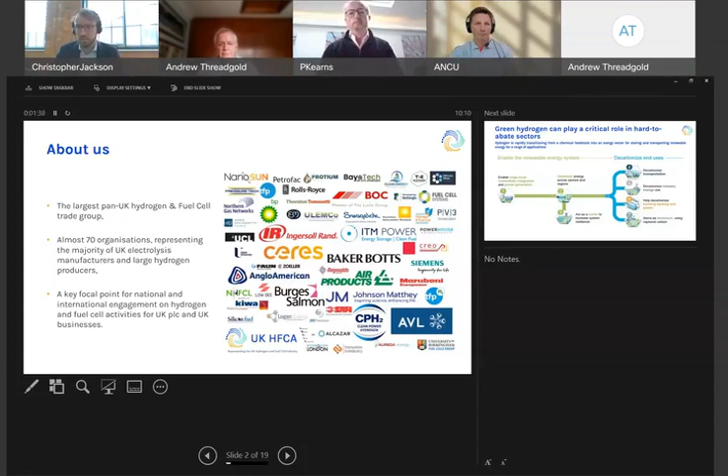So we're playing quite a significant role at the moment in trying to ensure that this next wave of the zero emission transition is essentially one where the UK can take the most opportunities to really lead in and develop a strong manufacturing and skills base. And obviously, it can stay a key part of that process and continue to be a leading market, as well as more broadly the London market. And insurance is something that we're obviously keen to support as well.

So getting right into it, a little bit of background. I think people probably by this stage will have been reading a number of articles around hydrogen and probably asking themselves, why are we talking about hydrogen now? What is the relevance to the particular discussion today?

So maybe as a quick starting point, today we produce around 110 million tons of hydrogen annually, 70 million tons of which is commercial. It's about a $135 billion market annually, with around 50% of it going to the production of ammonia and the balance going to processes such as the refining sector, hydrogenation of fats, direct reduction of iron, and various other applications.

What we are talking about more broadly in the press, and I think more broadly in industry, is looking at the opportunity to use hydrogen as a fuel for the energy sector transition. And really, there are several drivers behind that. The first is a bit more of a macro picture story, which is that when you look at the global energy consumption pattern, around 20% of total final energy in the world is consumed as power, and the other 80% is in transport and in heat.

And when you look at the story of decarbonisation over the last 25 years in those three blocks, you'll see that we've made reasonable progress in the power sector and almost no progress in heat and almost no progress in transport. And a large part of that is because while electricity is a very valuable form of energy that I think we all use today, it's not particularly convenient, it's not particularly flexible, and it doesn't necessarily provide all of the things that we want energy systems to provide us.

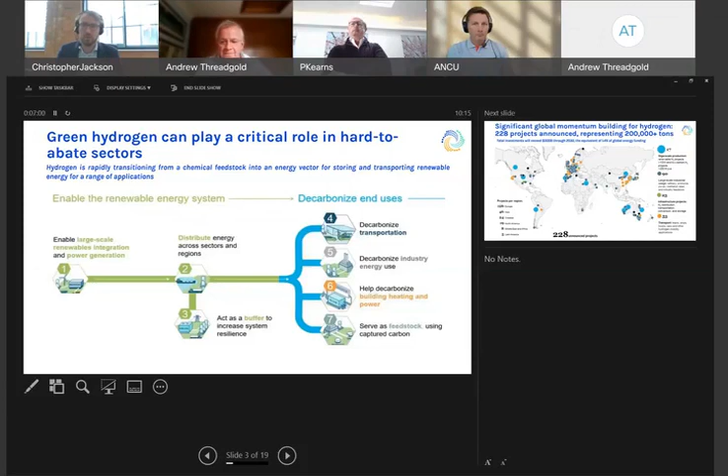And finally, the idea then of using hydrogen to actually create products. So where you can capture carbon from an industrial process and combine it with hydrogen to create products like green methanol or green ammonia. And these can then be used for the shipping sector or for other sectors where, again, we need to decarbonize.

So in the last 3 years, we've seen a huge amount of additional interest in and around hydrogen. Hydrogen Council's tracked about 228 projects globally. At the moment, there's line of sight on about $300 billion of projects that have been announced publicly, of which they think about 80 billion is significantly advanced, and then another 220 is in its earlier stages of development. They've been largely European concentrated till now.

However, there's a huge amount of movement now in North America, with the latest announcement of a moonshot program to try and get the cost of hydrogen down to extremely low levels by 2030. There's also a huge amount of interest in Asia, specifically in places like Japan and South Korea, where there's a lot of discussions around actually saying, can we replace the coal-fired power stations we have today with ammonia, where that ammonia is created from renewable sources.

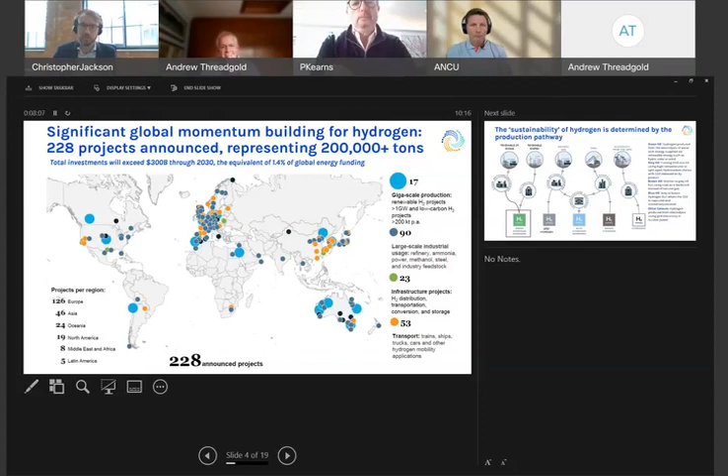And so a lot of very, very cheap renewable locations, including Australia, Oman, Chile, and others, are looking at, can we use our abundant solar and wind resources to create cheap green ammonia and then use that inside a lot of these existing power plants so that we don't have to replace existing assets, we can repurpose them and decarbonize them.

A little bit of terminology for those who aren't familiar. Hydrogen has, unfortunately, a lot of colors and it confuses a lot of people. So just trying to make this fairly simple. Broadly speaking, when we talk about green hydrogen, we're talking about hydrogen that either comes from a process called electrolysis. So if you remember your school chemistry classes, that's using an electrical current to split water into hydrogen and oxygen, or it can be the reformation of a bioenergy source.

So that can be biogas or biomass, where you're essentially saying that the carbon associated with that is net zero because it's a form of carbon that already exists in the environment today. You're not adding to it. And as a result, you're then splitting hydrogen from that carbon-based fuel, and that is considered green.

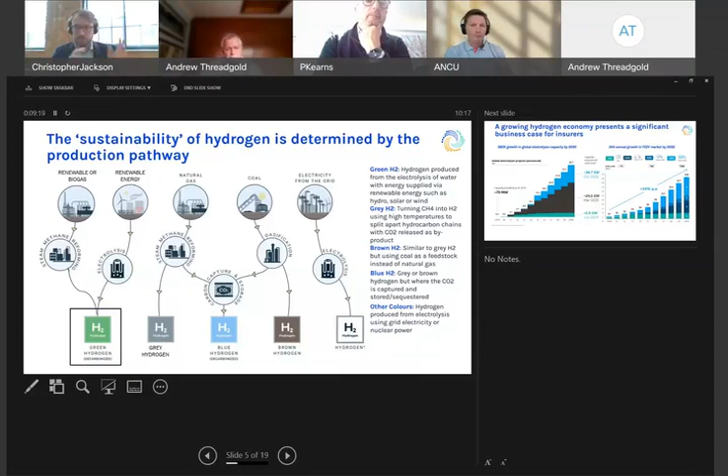Gray hydrogen is where you're extracting hydrogen from natural gas, and you're just releasing the CO2, which accounts for the vast majority of hydrogen production today in Europe and in North America. Brown hydrogen is where you're taking it from coal, and again, it's a similar process, reforming, gasifying that coal and then extracting the hydrogen from it. And blue is essentially where you're able to capture the CO2 that is coming from those fossils that have been converted into hydrogen and then store that CO2.

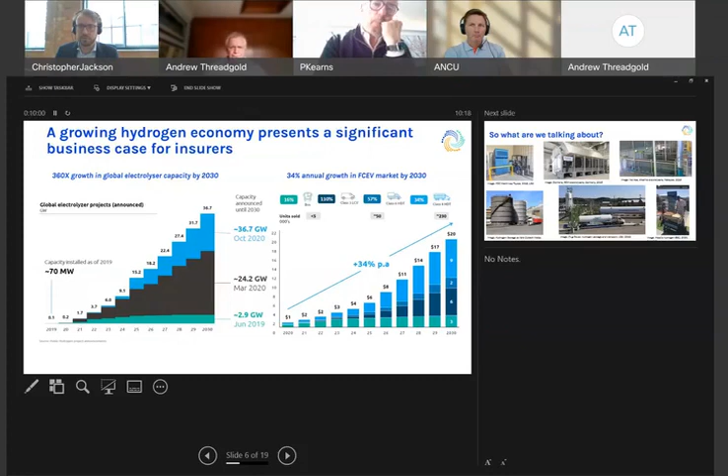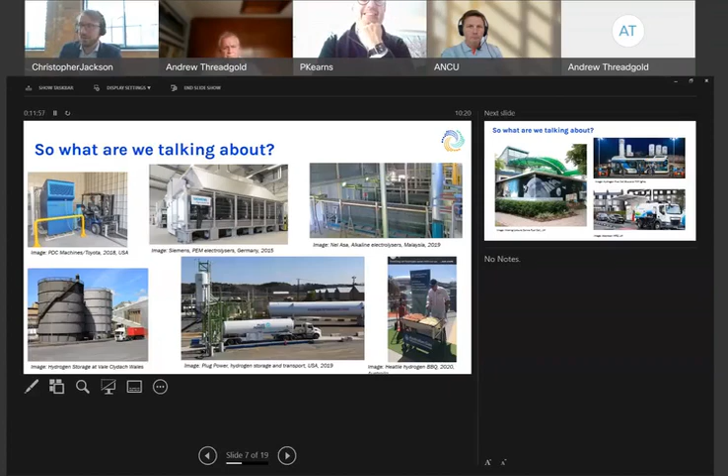A few other quick ones here. So image on the left is the Woking Leisure Centre, which has had a fuel cell operating in it since 2000. It was actually funded by the US Department of Energy. So for anyone who's around there, that's an example of technology probably under your nose. The other one is that there is actually a fuel cell system in the walkie-talkie building in London. So again, people might not be aware of that, but there is a system that's been running there for over 5 years too.

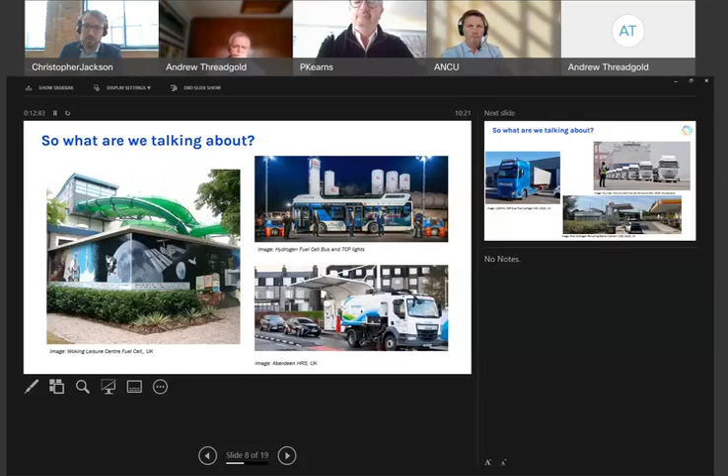There are fuel cell buses operating now, roughly over 3,000 globally. The image on the top right is one in Northern Ireland, but there are others that have just been announced in London, in Birmingham, a number coming into Liverpool and Brighton, and several hundred in Europe. And also hydrogen cars. That includes the Green Tomato taxi fleet in London, where there's 50 Toyota Mirai, but also things like street cleaners, which we're starting to see in Aberdeen. And then increasingly trucks as well.

So the top right was the first 20 Hyundai Xcient 20-ton trucks that were delivered into Switzerland last year. Dual fuel, diesel and hydrogen trucks in the UK, like the DAF image on the top left. And for those of you who go past the Cobham M25 station, there is a hydrogen refueling station that's also there. So you can drive and see that whenever you want to.

So what does a green hydrogen project actually look like visually? So I'm going to give you an example here. This is a 20 megawatt solar PV project with a 10 megawatt electrolyzer. It's in Fukushima in Japan. The hydrogen produced is then injected into the gas grid, and they blend it up to 5% with natural gas. And it's a way of increasing the amount of domestic renewable resource available, but converting it into a form that's most needed in the area, in this case, gas rather than pure electricity. So just a bit of a whistle stop, but hopefully gives you some ideas.

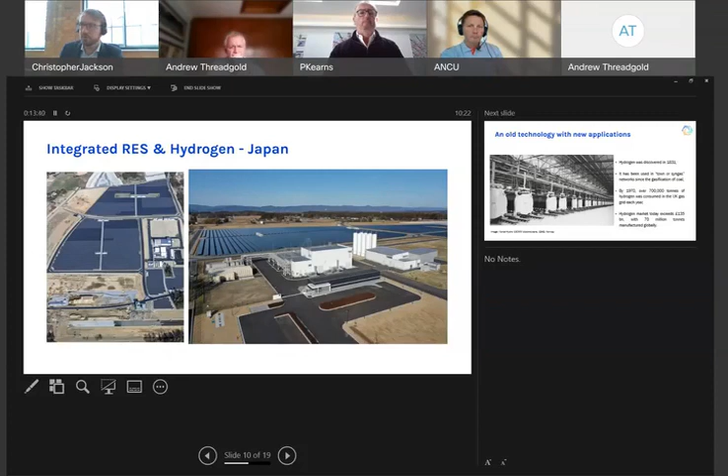And repeating something that I'm sure many people will have said before, this is an old technology. Electrolysis itself as a process is over 100 years old. This is a 130 megawatt alkaline electrolyzer in 1949. Large-scale electrolysis was very common in the days prior to mass shipping of ammonia, because frankly, it was a local game to create hydrogen, and it was largely done behind large hydropower sites. So Egypt, for example, or Norway, or places like Zimbabwe or China did have, and many still do have, large existing alkaline electrolyzers.

In the UK, we also used to have a large portion of hydrogen in our gas grid. For those who remember the town gas grid systems, or families who might have had town gas, there was at one point 50% of all the gas within the UK system was town gas. So it was hydrogen within the town gas system. And that actually, by our calculations in 1970, meant we were consuming over 700,000 tons of hydrogen within the gas grid at the time. So, when we talk about blending into the gas grid, we talk about hydrogen in homes, we talk about changes of applications, a lot of these things have already been done before.

And indeed, over a 10-year period, we moved from a town gas system to a 100% methane natural gas system and changed over 40 million gas appliances at the time. So when we talk about these things, they're not outside of the realm of the possible. And I think that's something we need to focus on a lot when we talk about the decarbonization challenges. It's not just what is the optimal for someone sitting in a room with an energy system model.

It is also what is practical and what is deliverable. And actually, I think one of the pieces we see about hydrogen is that it's a technology and a solution that we've used before, that we're familiar with. There are robust procedures in place. And the question is, how do we make it commercially viable, and how do we expand its range of applications to find those appropriate solutions?

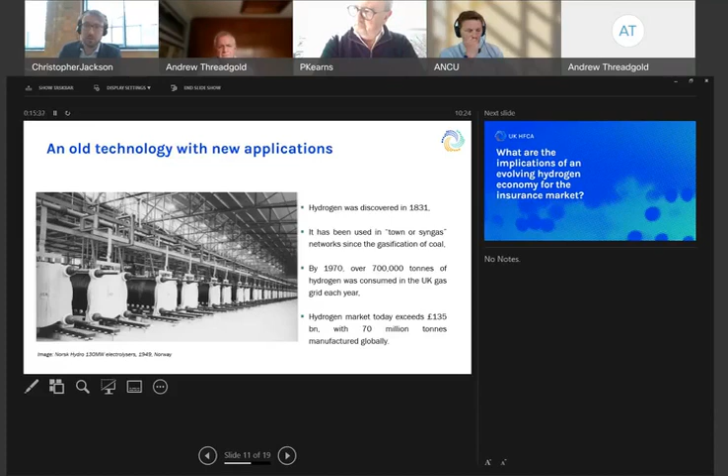Hydrogen will not be the answer to every single energy problem, but it will be a significant part of the solution for many. So some of what I've spoken about will have obvious implications for the insurance market, but maybe let's make them a little bit more specific. So clearly, given the size of the hydrogen market today and the fact that many underwriters are already covering ammonia production facilities, they're already covering refineries and other chemical sites, hydrogen risks are already being insured and placed within the London market.

I think part of the challenge perhaps is that it's not within the conventional energy market, more likely within the property and other forms of specialty markets. And as we've mentioned, the key here is to think about the fact that hydrogen is moving now from being a process or a feedstock gas into being an energy source. And what does that mean from an insurance perspective? And what does that mean for the risks and end use profiles?

And how can we then take the benefits of all that experience and lessons learned on how to insure the type of risks that are coming out of hydrogen production, storage, and distribution from those markets where it's already being covered today, and bring those learnings across into new markets that are less familiar with it. There are obviously areas as well where Lloyd's can lead on some of this, and other markets in London have led on new forms of technology.

So from our side, I think that's where, from the industry, we'd like to see more engagement. I think the market could play a huge role in helping to unlock some of the financing opportunities around it by being able to show that these are risks that the markets have seen before and that they're comfortable with. Maybe just to recap some of those risks for those who perhaps are less familiar. There are a couple of the obvious ones.

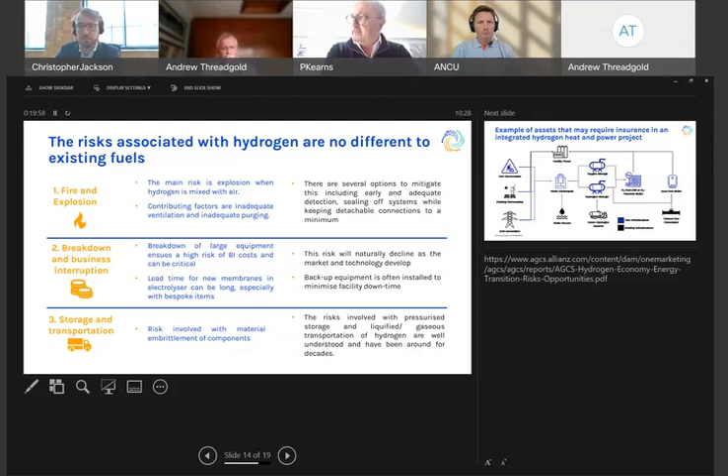So maybe just explaining what some of these projects actually look like. So when we talk about a green hydrogen project, the main 2 ingredients, if you like, are the source of electricity and source of water. There are a number of different ways in which you can source that electricity and a number of different business models being pursued in the market to look at this. Some is additional renewables, so building new solar, new wind, new hydro. And part of that, as I say, is tied to government policy and tied to what some investors and some end users want to see, which is additionality, evidence that you're not simply repurposing electricity from the grid, you're actually adding new renewable electricity to the grid.

Some projects are looking at connecting to existing renewables, so those that may already have contracted off-takers, they may already be under a feed-in tariff regime or some other form of price support, and some may just be a more generic grid connection where there is some form of power purchase agreement or deal signed with a utility. When we're then looking at the electrolysis process, an electrolyzer itself, it's an electrochemical reaction. So in that sense, there's not a lot of moving parts, but there is an importance of making sure the water source is correct. So the most valuable part of an electrolysis system is the membrane. The wrong source of water can contaminate the membrane and can then lead to a loss on that asset.

So that's something that's very important to consider, as is actually then the ultimate treatment of oxygen from that production process. So hydrogen obviously is the commodity that most people want, but there is a significant volume of oxygen also created on these larger projects. And in smaller electrolysis projects, oxygen can be vented, but in larger projects, that's unlikely to be deemed safe or appropriate. And so having the right measures in place to ensure that that oxygen is either being stored or is being released in a safe manner is important. And then obviously how you distribute that hydrogen afterwards. Is that going through a gas grid connection? Is that being moved by vehicle? Different projects have different configurations.

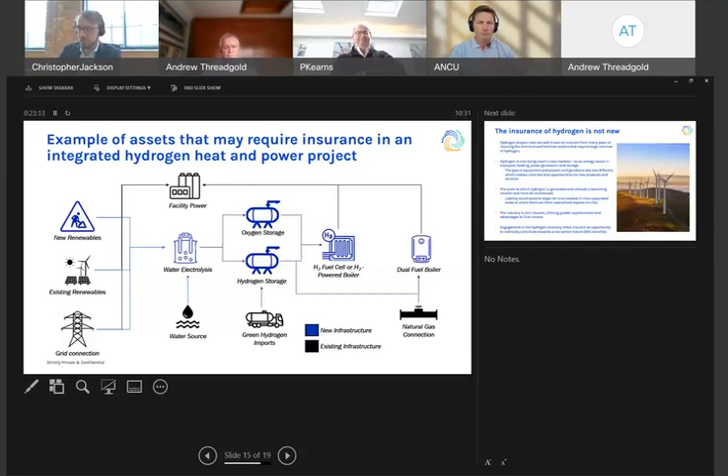Others are going to be dedicated lines where they may be combusting up to 100% hydrogen. And again, there are sites that have been doing that for a long time. So if you go to the Inovyn site in Runcorn, that site has been combusting 100% hydrogen as a byproduct of its chloralkali process for over 50 years. So again, a lot of this is probably familiar, but we can always cover this more from the questions.

So just to close up and repeat on some of the common themes, it's really important to emphasize here that the insurance of hydrogen is not new. What is new is the way that some of these hydrogen projects are being configured and the way that hydrogen as a product is being used. And that's the piece that I think is critical to focus on, taking the lessons and understanding from those sectors within the insurance market that have familiarity with hydrogen and bringing those learnings into the renewables market, and being able to also draw on learnings from other early renewable systems, including biogas, is really important.

It is the case that there will be some creative thinking needed around certain products like business interruption and around third-party liability. So hydrogen is not a pollutant, so you're not going to have soil contamination if there's a leak, and you're not going to have those legacy liability issues, but you do have other issues to consider, like the blast radius concerns and other safety concerns with regards to leaks.

Obviously, the other component that people have picked up on is that for green hydrogen, much of the market might be distributed and so decentralized. That then may mean that unlike a large chemical site or a large refining site today, you do not have the same number of people constantly on the site with that same level of technical expertise monitoring these assets. And so how do we ensure that that is still safely done, still done in a robust way, without imposing huge costs on these distributed projects by having a very large permanent presence there?

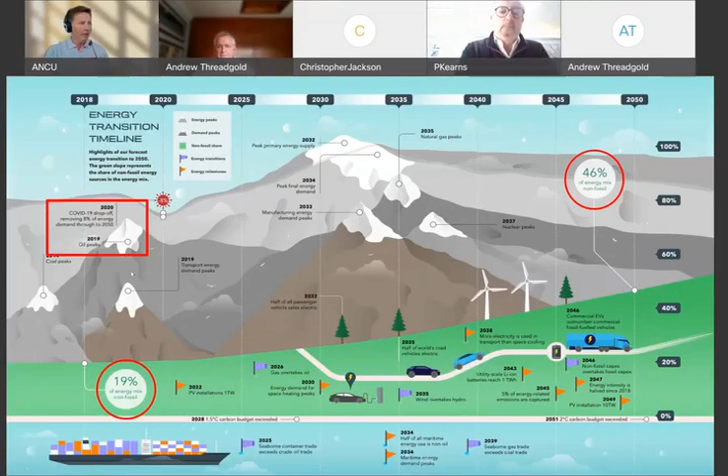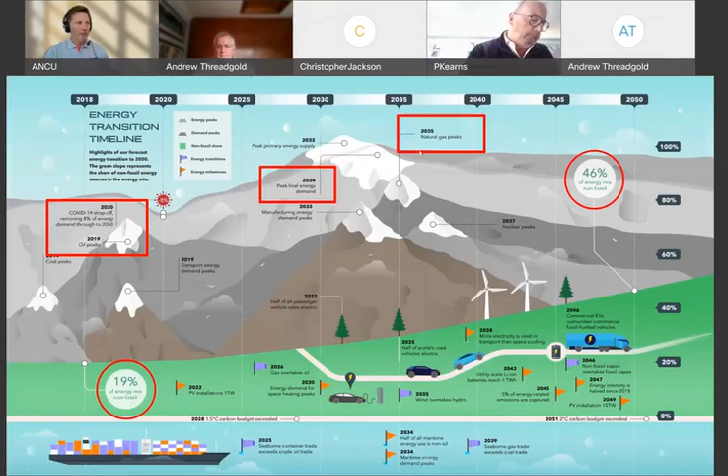Further detail, COVID drop-off on significant energy demands, as we're all aware, from the point of view of transportation, traveling and things like that. Energy, we're looking at a peak energy demand in 2034, and then natural gas peaks, but then obviously turns off in some areas from there.

So hydrogen production, Chris has already mentioned this, so I don't want to dwell on that, but obviously at this moment in time, as things develop, it's a supply and demand journey. As things develop, renewable energy will grow significantly, but obviously that's based on the demand from a consumer or an industrial point of view as well.

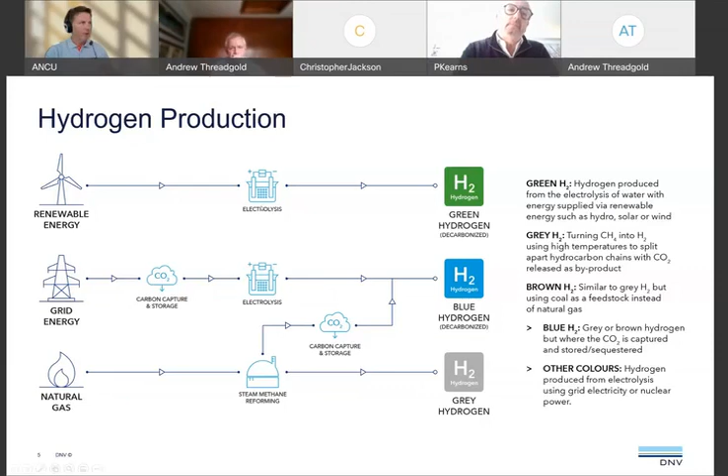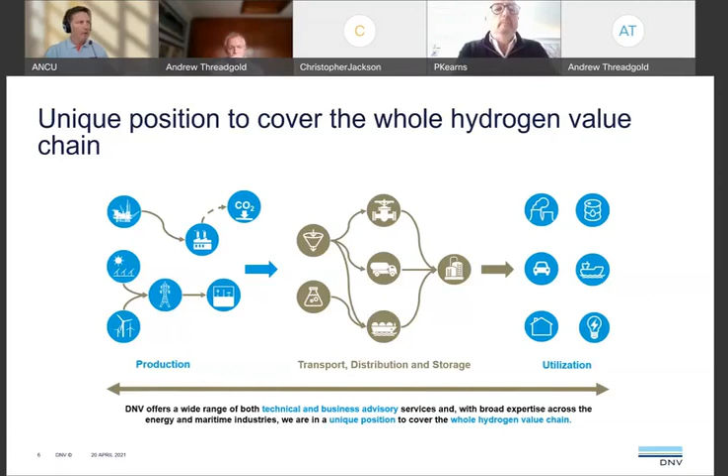Unique position for DNV. Obviously, we provide technical and business advisory services from the production, transportation, and also utilization points of hydrogen and cover the whole value chain. So really from a maritime aspect to transportation on land to the types of burners and power aspects to be used. So we cover the whole project life cycle at the moment.

What I want to talk about today is a little bit about the R&D and innovation aspects as well. We've seen a little bit about the concept selection and operations, but let's talk a little bit about the R&D and innovation. And that's a legacy we've been involved in in the past, from North Sea research into natural gas research and heavily into LNG, and now understanding the comparisons to hydrogen from, shall we say, a safety point of view, a risk point of view, but also understanding how it's managed.

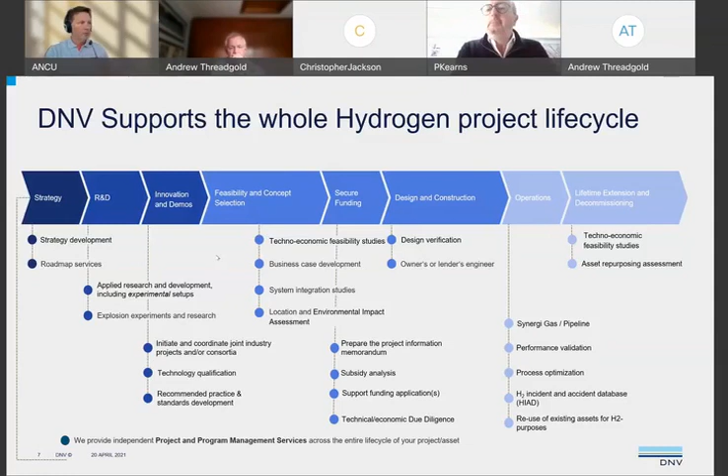So regulatory issues at this moment in time. This is just a slide from the EU. So a lot of discussion on hydrogen guidelines, working with the gas transportation companies, the TSOs, the end users, fueling stations, but also the production aspect. So there are some challenges going forward on regulatory issues, bearing in mind a lot of these frameworks and foundations are already in place for natural gas. They're not quite there at this moment in time for hydrogen.

So it's understanding those aspects of repurposing gas pipelines, safety considerations, rules for hydrogen and ammonia fueled ships, classification and things like that, subsurface storage of hydrogen, road transport, and footprints and connecting electrolyzers and the electricity grid. So there's lots of things to go and focus on.

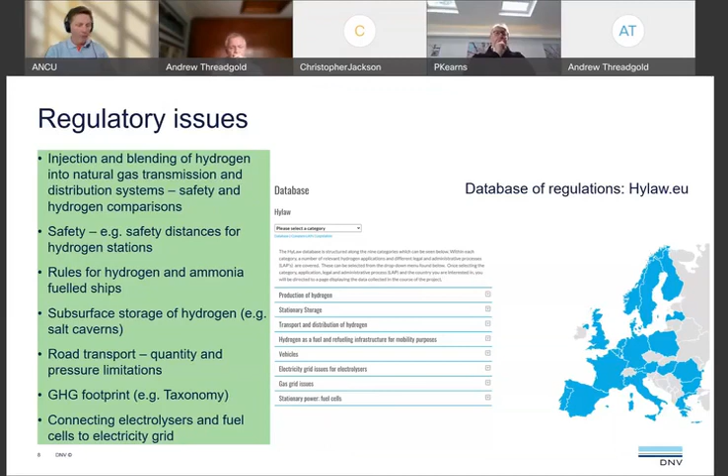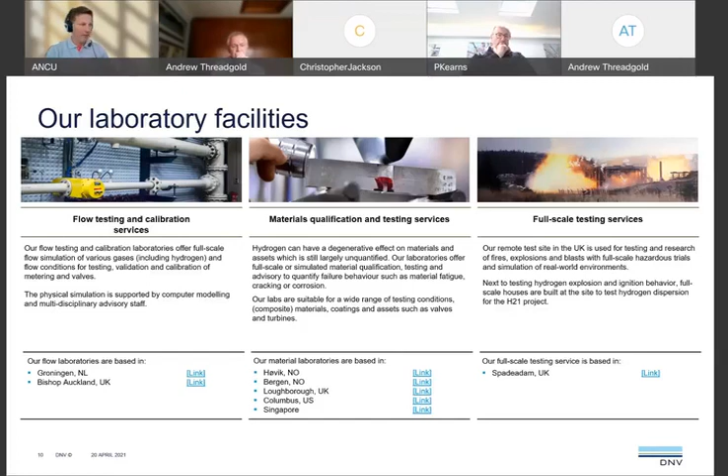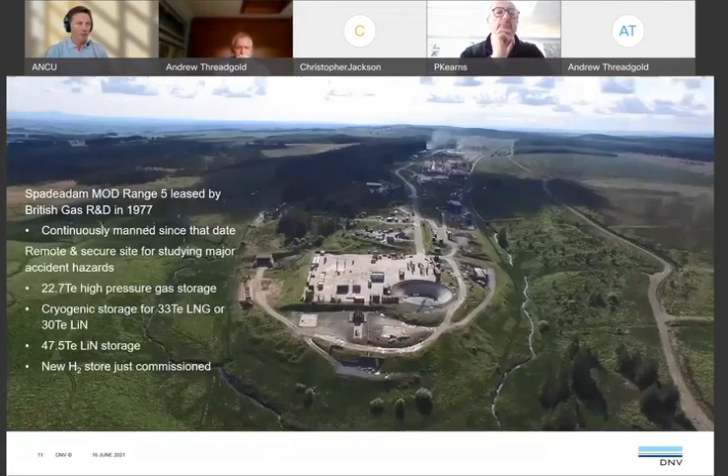So our research facilities are based on flow testing, calibration services, materials qualification, pipelines, metallics, and then some full-scale testing aspects. So all built and form a part of the transportation and use of hydrogen aspects as well. So Spadeadam itself, where I'm involved, has been well developed and well used as a research and development centre. As Andrew said, there's probably a number of people on site who've already attended this. And if you do get the opportunity, it's well worth a visit.

We've got high pressure storage on site. It's a very remote and secure site in the northwest of England. But we also have the ability to do large scale major hazard testing. And we've also got hydrogen storage, which has just been commissioned as well.

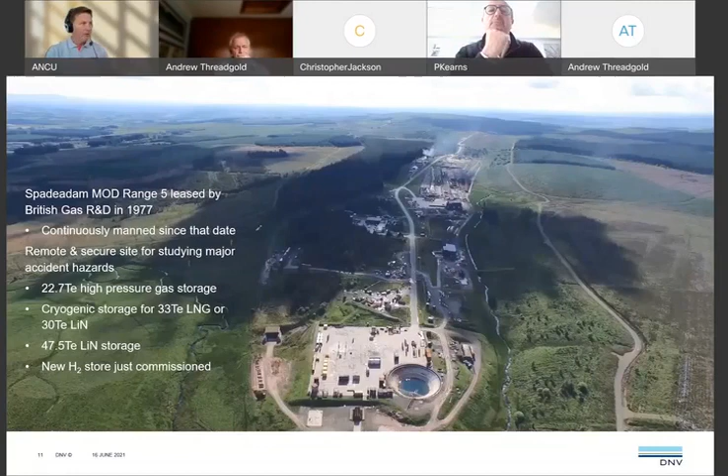So basically, our services approach to hydrogen research programs is understanding the transportation of hydrogen, looking at the hazards, the behavior, and offering some sort of risk management to understand how it could be operated and maintained safely, and also how it complies with any new safety regulation which is going to be in place.

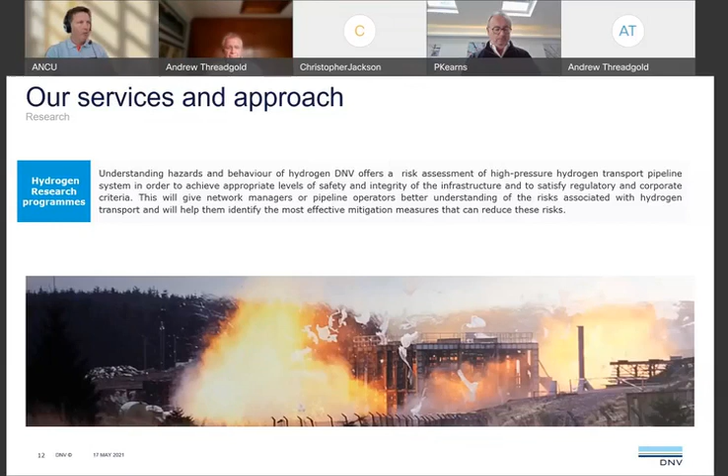As Chris said, hydrogen has been used in the past. There has been some research done on hydrogen. We've completed some research on a hydrogen filling station for Osaka Gas, understanding the different types of accumulation of hydrogen, understanding how it builds up, and also what happens if it does ignite or reaches a certain point. So those types of research need to be undertaken to understand consequences and some of the risks involved.

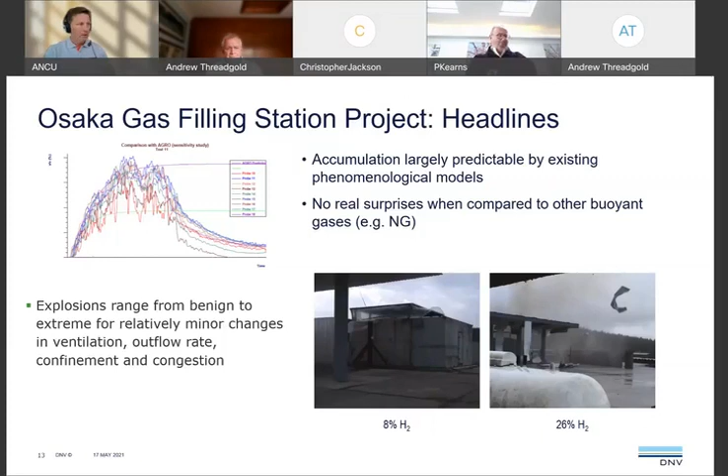Liquid hydrogen research: we're seeing more and more marine aspects on a small scale at this moment in time, but that potentially will go large scale with the transportation of liquid hydrogen, and ammonia as well at some point. So it's understanding those aspects.

And this particular project was looking at what risks or challenges there are during bunkering when they were supplying and loading hydrogen. This piece of work was done about 2 years ago, looking at how it might disperse, ignite, and build up in certain enclosures and things like that. So we have the ability to design bespoke rigs to understand the behavior of hydrogen or any other types of materials as well, particularly in confined spaces and how it builds up.

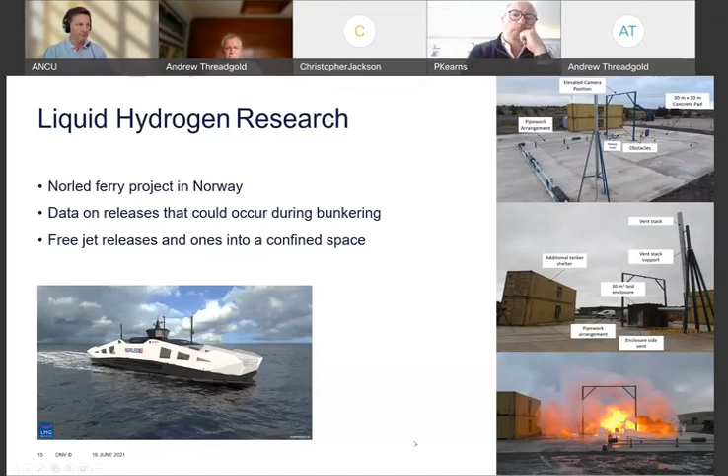We mentioned existing transportation, and Chris mentioned polyethylene pipes for the gas distribution systems. So a lot of it is understanding the repurposing of assets, potentially whether it's blending, but also further down the line, it could be repurposing with 100% hydrogen. So this project, H21, is ongoing with Northern Gas Networks. It's funded by the government through Ofgem.

The houses you see at this moment on the video are DNV High Street. We built these houses to do hydrogen research. There are 3 houses, all with different types of flooring. One's got a loft, one's got a cellar. So it's understanding if hydrogen goes into that, how it behaves, similar to natural gas as well. So this project's ongoing, and it is advancing significantly.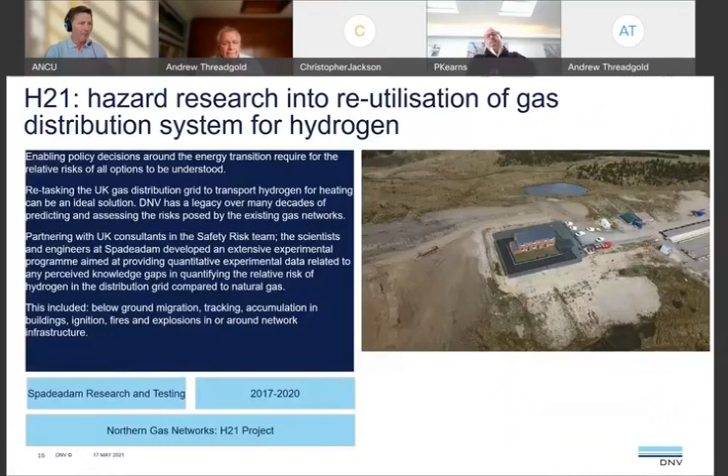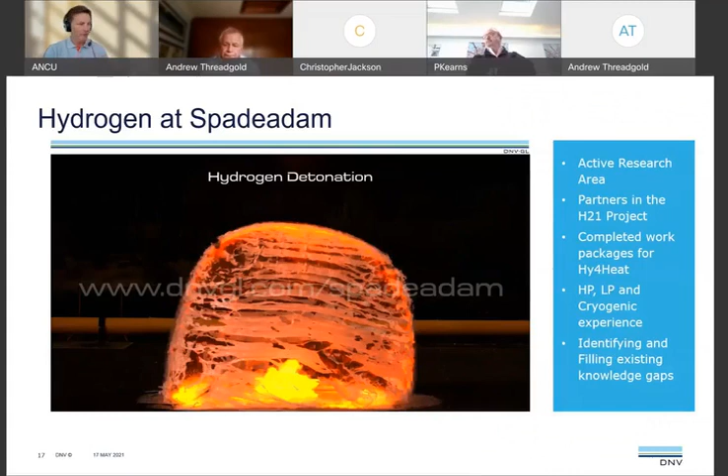This is just a little bit of understanding of hydrogen at Spadeadam. We're an active research partner in a number of projects, H21. We've completed work packages for the government Hy4Heat project, which Chris mentioned, which is being funded by BEIS but led by Arup. It also looks at high pressure storage, low pressure cryogenic, and understanding the knowledge gaps on hydrogen.

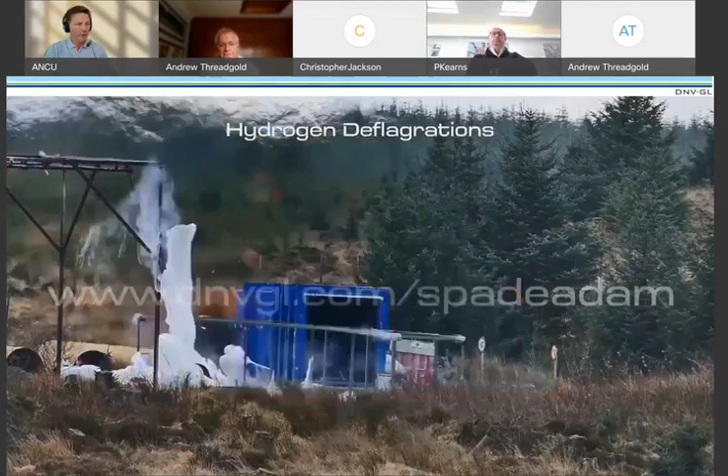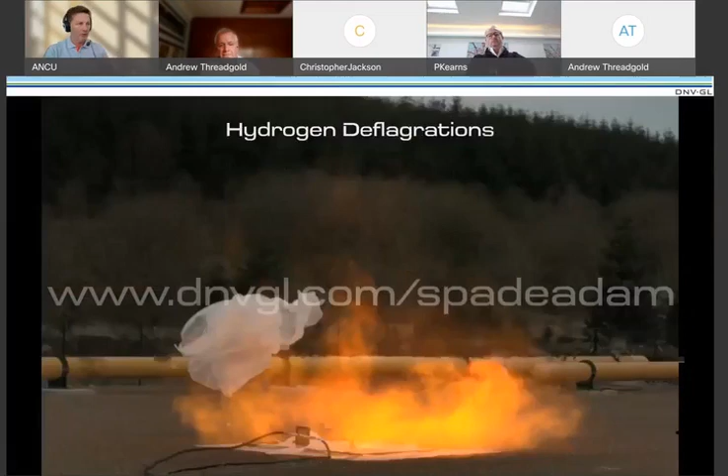And this is just a short video on some of the research and demonstrations we do with hydrogen. So it's understanding what happens if something ignites, the risks or consequences. So that's a hydrogen deflagration, a hydrogen detonation, and what happens from that point. These are all on high speed cameras, so you can actually see how it builds up. And a lot of this work is done comparable to natural gas to understand the differences in how it behaves.

So from the safety point of view, at the moment there are guides on gas safety regulations. So everything's in place for the gas requirements and pipelines. That's not quite the case for hydrogen. So there's a lot of work to be done to understand the differences of hydrogen on the transportation aspects. And simultaneously, the regulators will be looking at how hydrogen has an impact on existing regulations or develop new regulations to allow that.

So hydrogen work for H21 is looking at the QRA, test result validation of models, but also preparing draft safety management frameworks to allow the gas transporters to manage hydrogen safely through projects or longer term, whether blended, maybe 20% blends, or 100%.

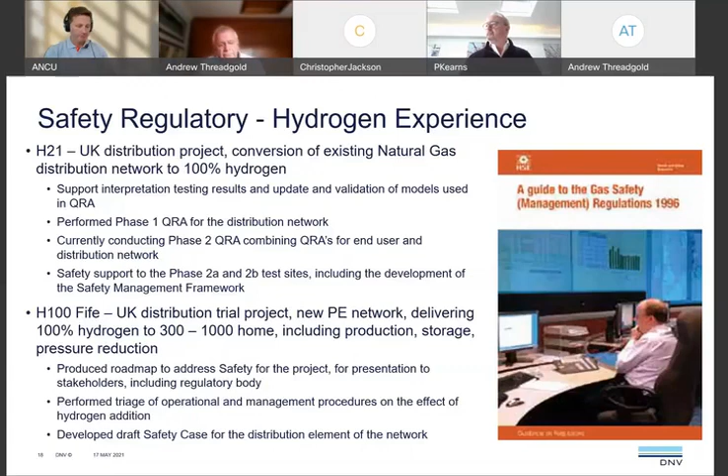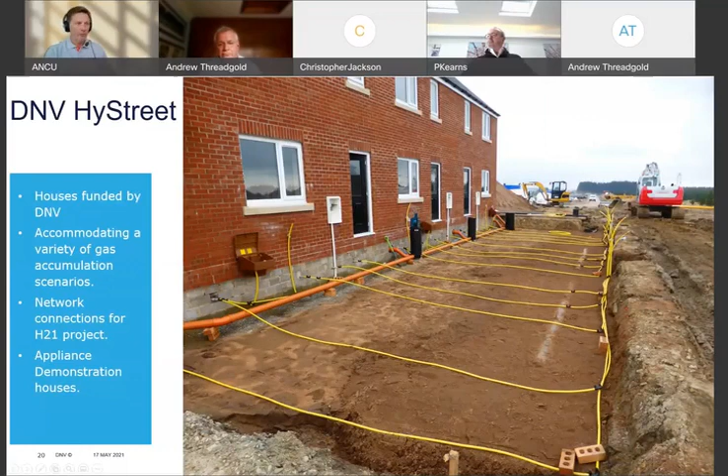At this moment we've got 2 hydrogen boilers installed in there, so they're actually running on 100% hydrogen. The Hy4Heat project was looking at the build-up of hydrogen in particular areas of the house, in the kitchen and the living room.

These are all sensors, so the whole building's very much sensored, built into the cavity walls, the ceilings, the windows, certain points, kitchen cupboards. So it's understanding how it builds up to certain levels, with comparisons of methane and hydrogen releases. That data was then fed into the Hy4Heat program to understand the risk compared to natural gas, but also any ignition potentials.

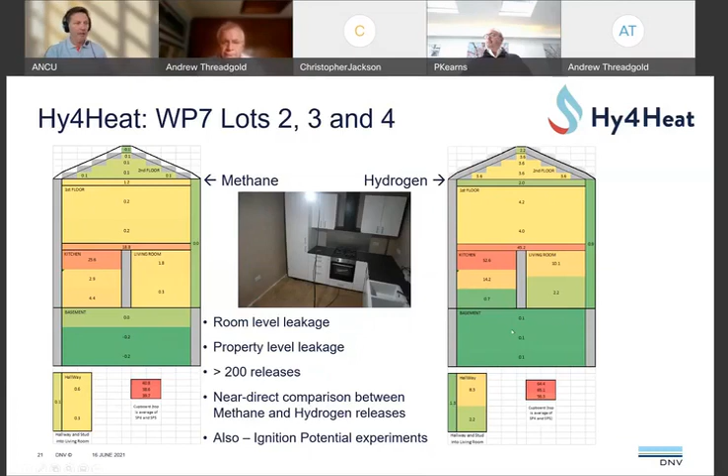As you can see, room level leakage properties. You can see a remote control window, so everything was controlled from about a kilometer away from the houses. The hydrogen could be released or vented through the windows, which opened automatically. So everything was undertaken safely and controlled.

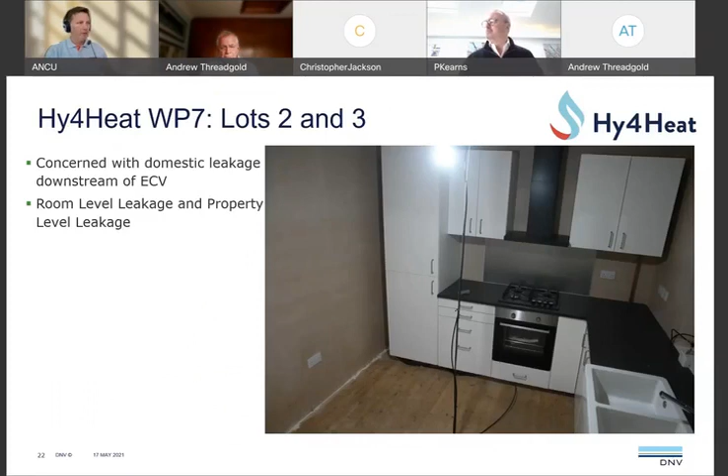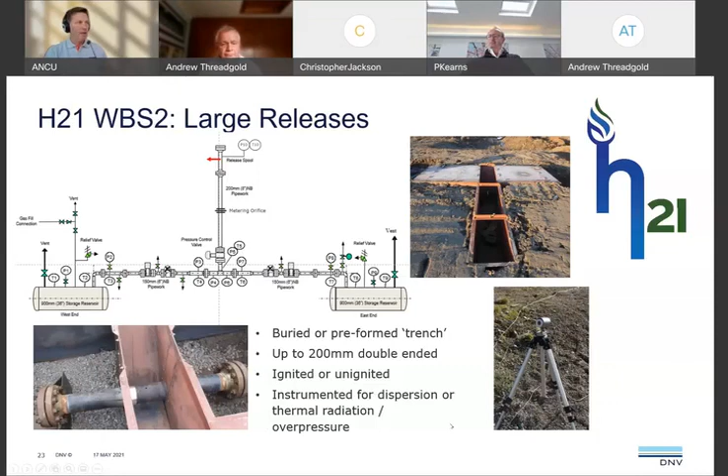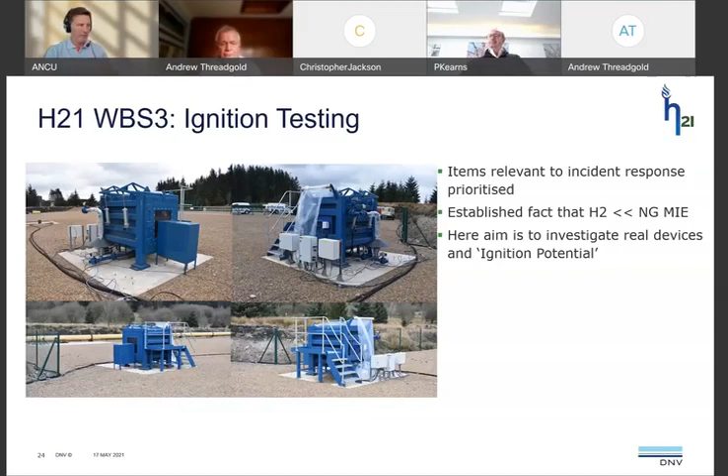Ignition potential, ignition understanding. A lot of the work previously was done on natural gas to look at what could cause ignition. These were then repeated against hydrogen, for example, iPhones, car starter motors, all the way down to domestic appliances like a vacuum cleaner and things like that, washing machine motors as well. So that data would then provide the differences for hydrogen compared to natural gas. So these were four examples of work packages from that point.

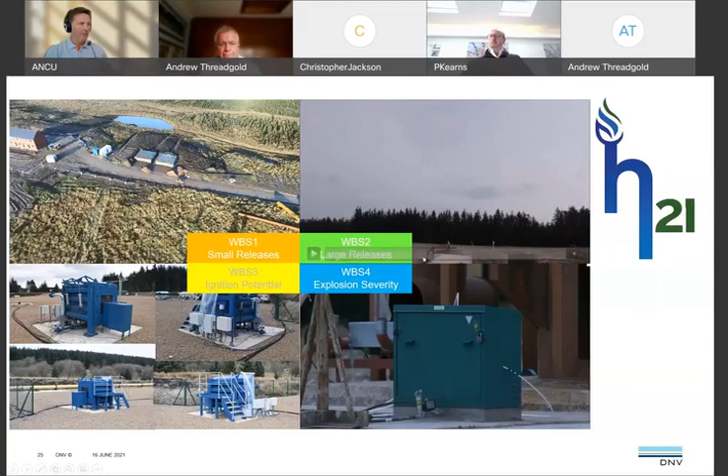Small releases had allotments set up to understand how it might track in a garden with flag surfaces or grass or a sand surface, so to build up from that point. This was the large releases to see what would happen if there was a release and it ignited, what type of data would be captured from there. As you can see, this is a hydrogen flame. This is odorless at this moment in time, but they are looking to put an odor in which would be comparable to natural gas, the same one.

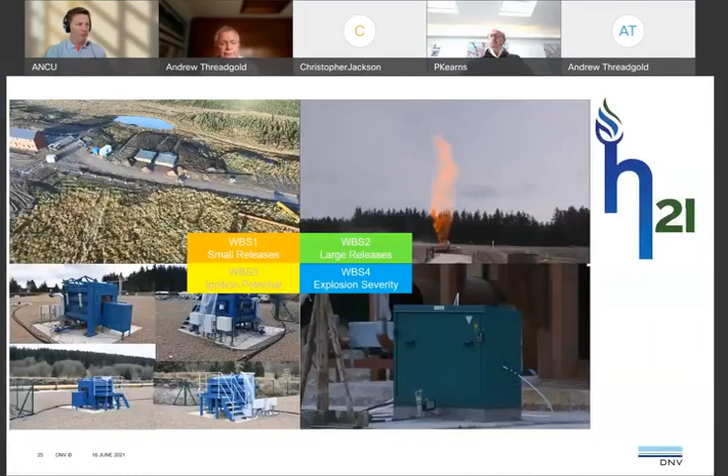And this is explosion severity, understanding what might happen with a kiosk if it did reach the ignition point. So all these were part of the H21 program, which is ongoing, progressing in detail from there.

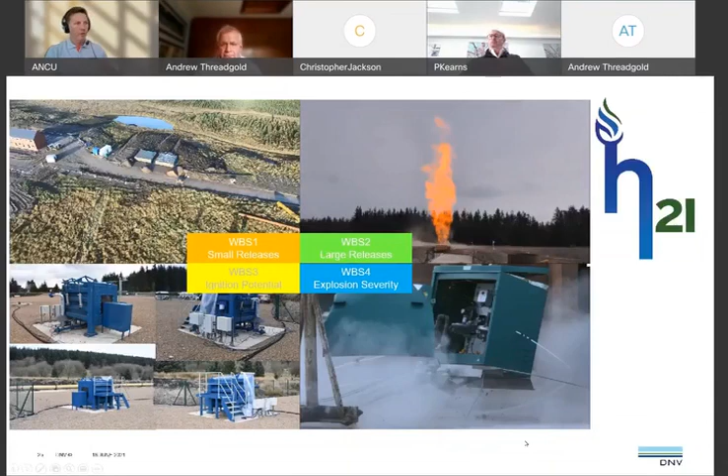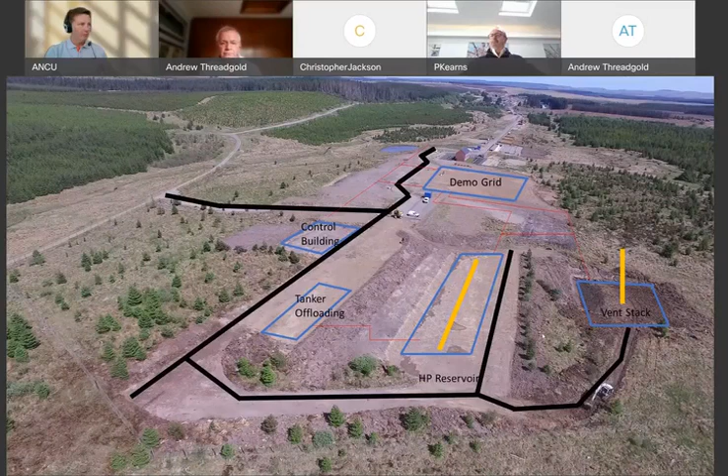So this demonstration grid is now complete. I'll just move on to that one. So we've got all this, that's the reservoir storage supplied by National Grid for the H21. So this is the construction aspect. So everything which was comparable for natural gas is being supplied and going to be reviewed for hydrogen aspects as well. So it's about repurposing, but it's also understanding the day-to-day operations.

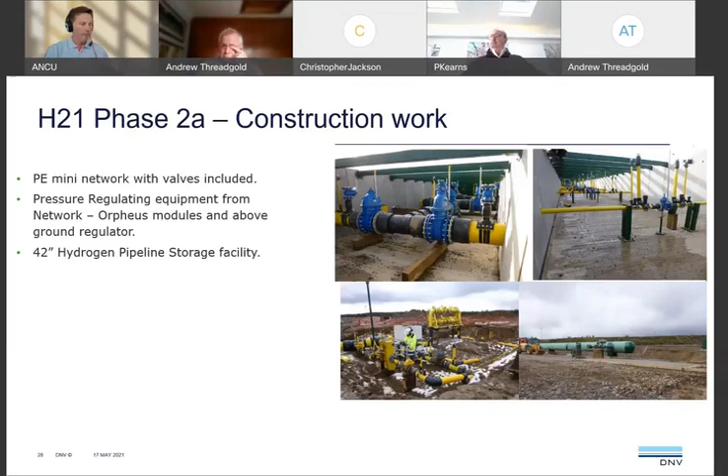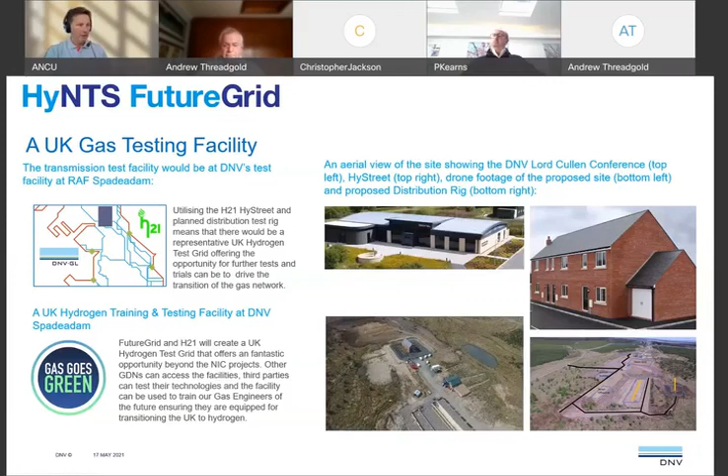So coming on to the main supply, we're then looking at National Grid's program going forward. This is looking at the existing national transmission system, which currently supplies natural gas from St Fergus, Isle of Grain, Milford Haven, and supplies all the rest of the UK right into the distribution network. So the challenge is, can that be repurposed for hydrogen, whether that's a blend or 100% hydrogen. So this is the FutureGrid project, which is again a government funded project which we're involved with to understand how we can build repurposed assets and do testing.

So building a test facility, what we're doing is looking at how repurposed assets from National Grid's transmission system can be decommissioned, transported back up to Spadeadam, and then reinstalled into this system here, which will include block valves, pipelines, entry points and exit points. It gives the whole complexity of a beach-to-burner test facility or research facility to look at how things need to be done for hydrogen.

Bearing in mind, procedures need to be understood and developed on hydrogen. Engineers need to be trained at this moment in time. There's very much a small knowledge capability on hydrogen that needs to grow very quickly, so people have the knowledge capability to understand and manage hydrogen going forward.

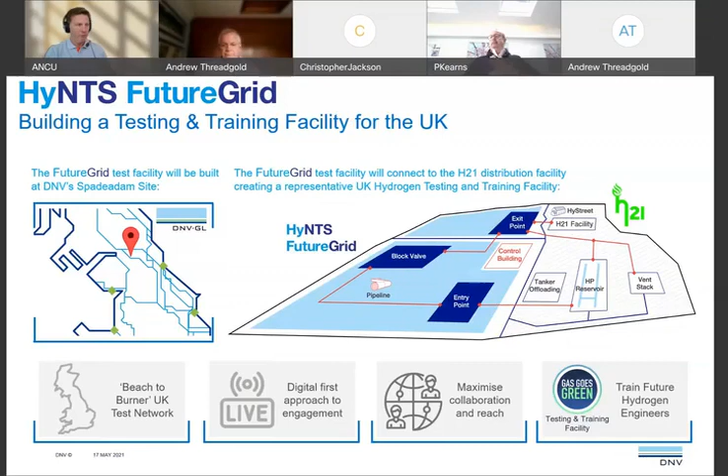So these are the entry points which are taken from location, Teesside, Bacton, various points of block valves, decommissioned, repurposed up at Spadeadam, pipelines, exit points. So everything coming from a regulator, a flow meter, filter. How does it operate on hydrogen? Can it be used on hydrogen? No leakage and things like that from a safety point. Understanding, bearing in mind, a lot of these assets have been in the ground 40 years. So what condition are they in? What can be done from that point?

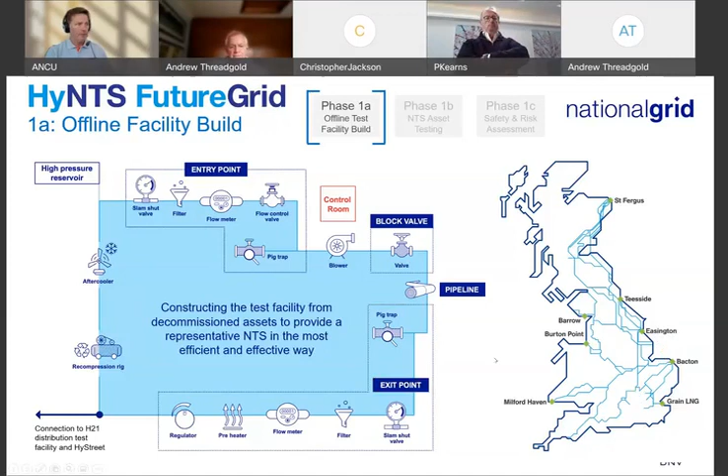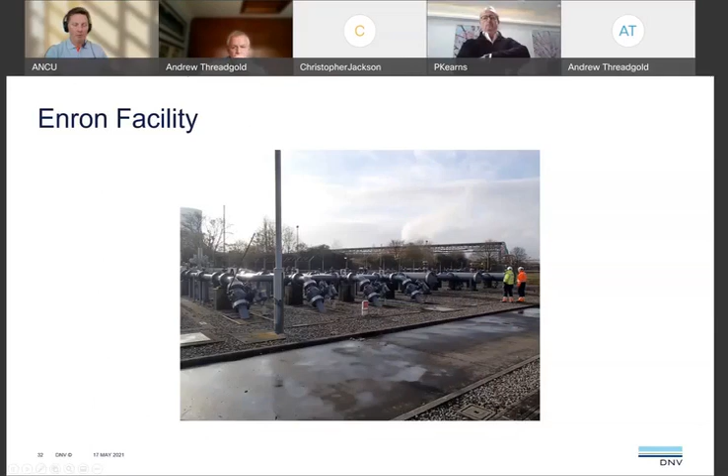So this would be a typical part of this facility that would be taken out, decommissioned and transported up to Spadeadam and put back in the facility as part of the program. So this is the design of the facility, which will link into the H21, decommissioned assets, entry points included, control room and a hydrogen storage reservoir as well.

So once this is up and running, there'll be a testing program which looks at operations on valves, compressor, metering assets, flow control and things like that. So everything that is currently done on the transmission system could be repeated here for hydrogen at different blends. So that's the facility at this moment in time.

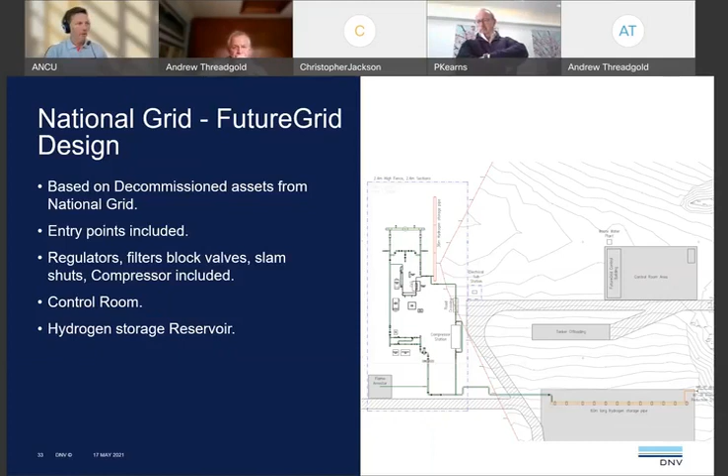This is the DNV HyStreet. This is the control room. This is the H21 facility there with all the distribution pipework below ground. This is the high pressure storage control room, and this around here will be the facility for FutureGrid as it's starting to be developed with the project now.

So as you can see, it'll be the world's first, shall we say, beach to end user facility where things can be tested on research, operational aspects, but longer term, when you think about it for the hydrogen journey, the amount of knowledge transfer and development of staff will need to be undertaken as well. Development of standards and things like that as well.

So that's the end of my presentation, just on the journey we're undertaking now at this moment in time on hydrogen and some hydrogen projects as well. And I think it's fair to say that it's not just the UK who are getting involved in the research on hydrogen pipelines or repurposed pipelines, but we're seeing a lot of European, the US are looking at blended projects, potentially down to trials on unoccupied sites as well. And also from a Middle East and Australia point of view, they're looking at how they can manufacture hydrogen, but also transport it very similar to what they do now with LNG.